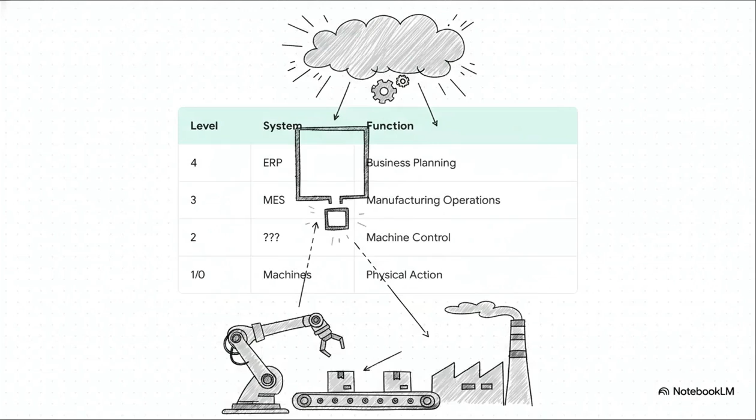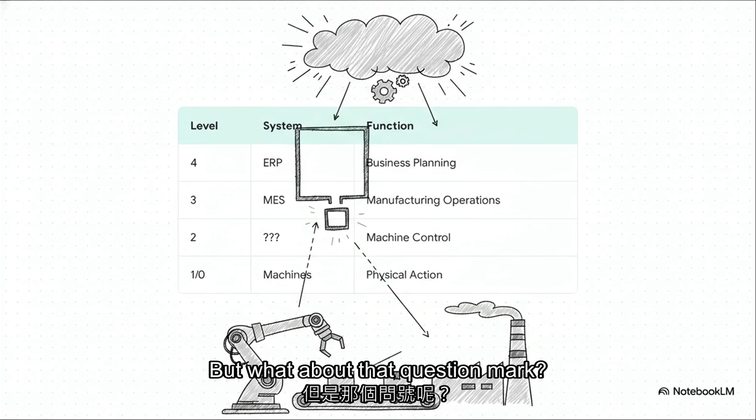See? Up top, you've got your ERP systems for business planning, down below, the machines. But what about that question mark? There's a huge gap right there at level 2. Something's missing. What's the thing that takes an order from the manufacturing software and tells a robotic arm exactly what to do? Right, that missing link, that's our hero for today.

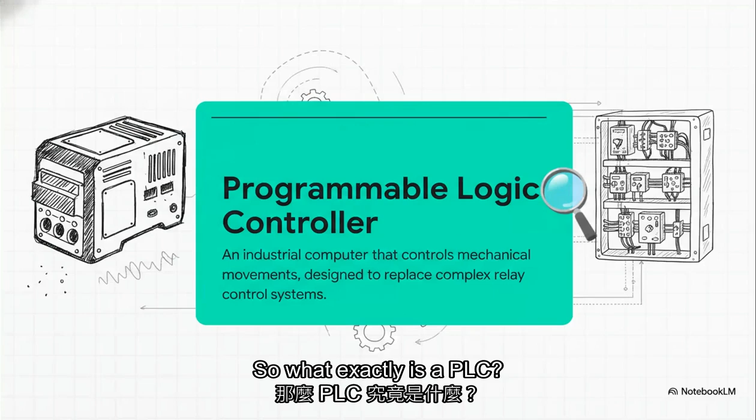It's the Programmable Logic Controller, or as literally everyone calls it, the PLC. So, what exactly is a PLC? Well, it's a computer, but trust me, it's nothing like the one on your desk.

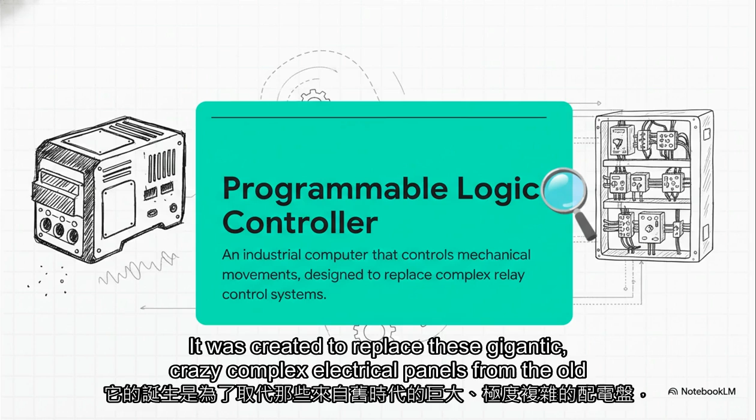This thing is an absolute tank. It's rugged, designed to get beaten up on a factory floor, heat, dust, vibrations, you name it. It was created to replace these gigantic, crazy complex electrical panels from the old days and give us precise digital control. And here's the magic trick.

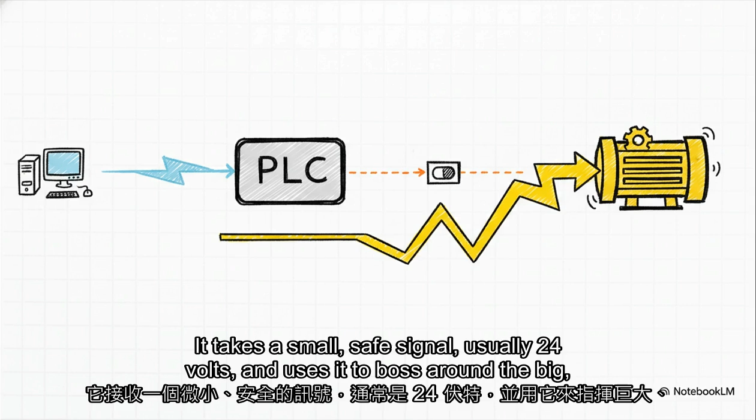Your laptop, it runs on a tiny bit of power, like 5 volts. A huge industrial motor, we're talking hundreds of volts. You can't just plug one into the other. That would be bad. So the PLC acts as a safe middleman. It's an intelligent translator. It takes a small, safe signal, usually 24 volts, and uses it to boss around the big, powerful machinery without anything blowing up.

Okay, so how does this thing actually think and act? The easiest way to get your head around it is to picture the PLC as a little robot person. It has senses to perceive the world, a brain to make decisions, and muscles to take action. And it does this in a super fast, non-stop loop called the scan cycle. It just does 3 things over and over again, thousands of times a second.

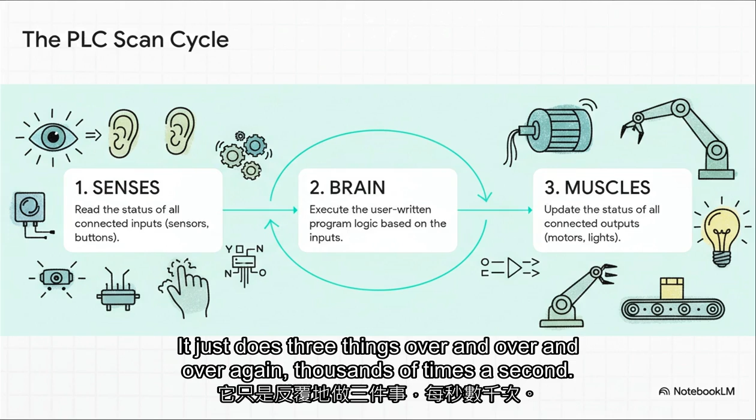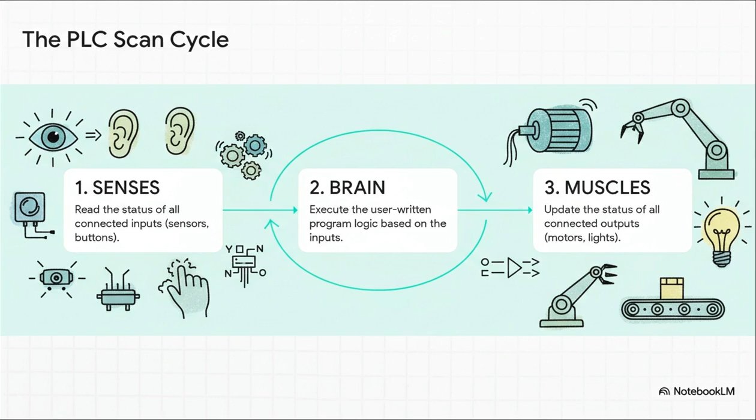1, senses. It checks everything around it. 2, brain. It thinks about what to do next based on its programming. And 3, muscles. It acts. So senses, brain, muscles. Let's dig into that.

First up, the senses. In PLC speak, we call these inputs. These are just signals coming in from the real world. Things like, is a button pushed? Did a sensor just see a box go by? Is the safety gate shut? The PLC is constantly checking all these inputs, getting a complete picture of what's going on.

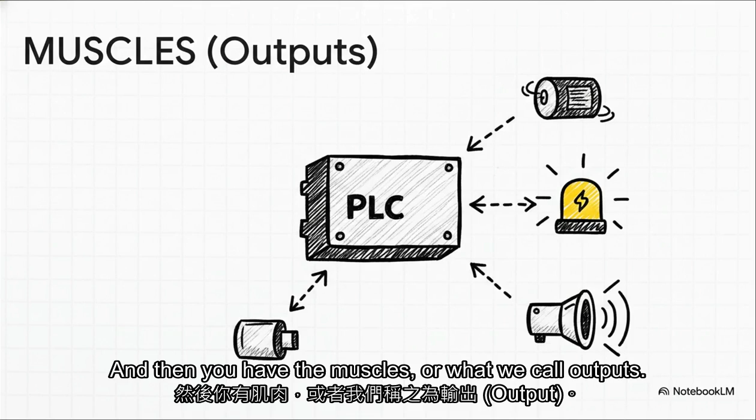And then you have the muscles, or what we call outputs. After the PLC's brain makes a decision, the outputs are the actions it takes. It sends a signal out to start a conveyor belt, turn on a big red warning light, fire up a robotic arm. You get the idea. This is how it actually controls things.

Okay, so what about the brain? How does it decide? Well, it's just following a program. But here's a cool part. The language used isn't what you'd expect, like Python or something. The most common one is called ladder logic. And it's visual. It's actually designed to look like the old electrical diagrams it replaced, which made it super easy for electricians to pick up.

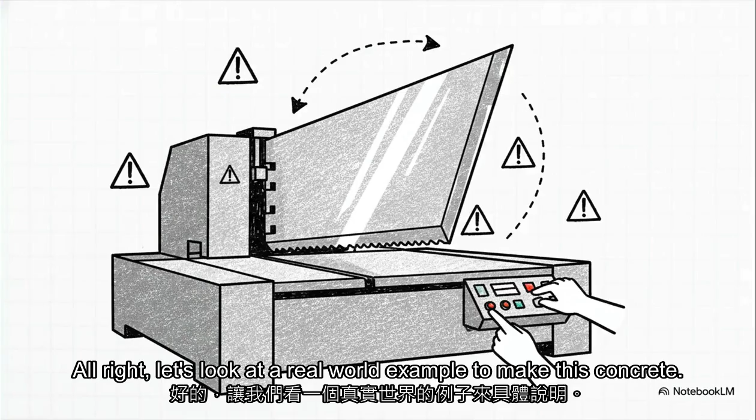All right, let's look at a real-world example to make this concrete. And it's a super important one, safety. Picture a giant industrial paper cutter.

I'm talking a heavy, razor-sharp blade that can slice through a phone book. Obviously, you do not want an operator's hands anywhere near that thing when it comes down. So the safety rule is dead simple, and there's no getting around it. For that blade to move, the worker has to have both hands on 2 different buttons placed well away from the danger zone. That way, their hands are physically occupied and safe.

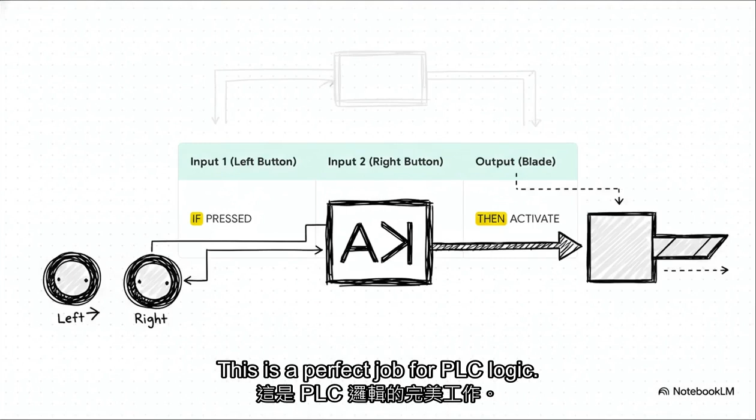This is a perfect job for PLC logic. The rule we program is a basic AND gate. It's just if the left button input is on and the right button input is on, then activate the output for the blade. The second either one of those buttons is let go, the AND condition is broken, the output turns off, and the blade immediately stops. It's simple, it's lightning fast, and it's rock-solid reliable.

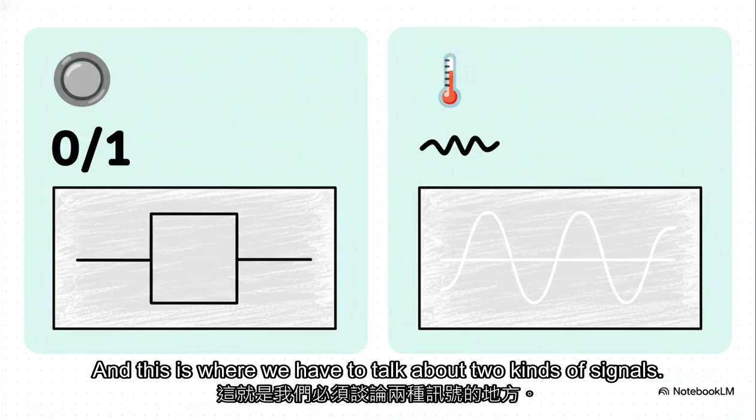But look, modern factories are about more than just on and off. That's just the start. If you want to make a factory truly smart, you need way more than just yes or no information. You need data, you need details. And this is where we have to talk about 2 kinds of signals. What we've seen so far with the buttons, that's a digital signal. It's either on or it's off. Simple. But most of the real world isn't like that, right?

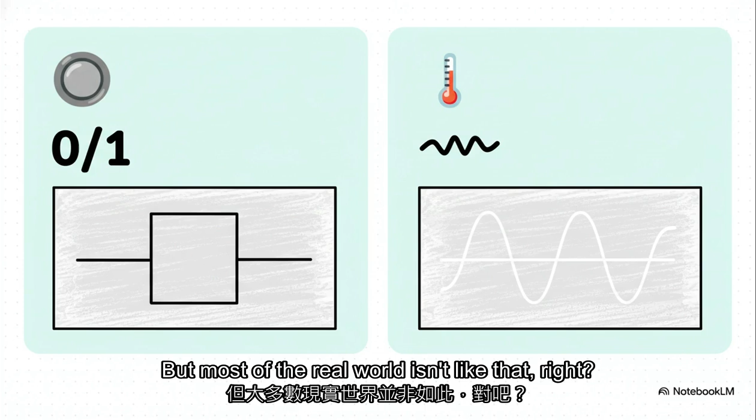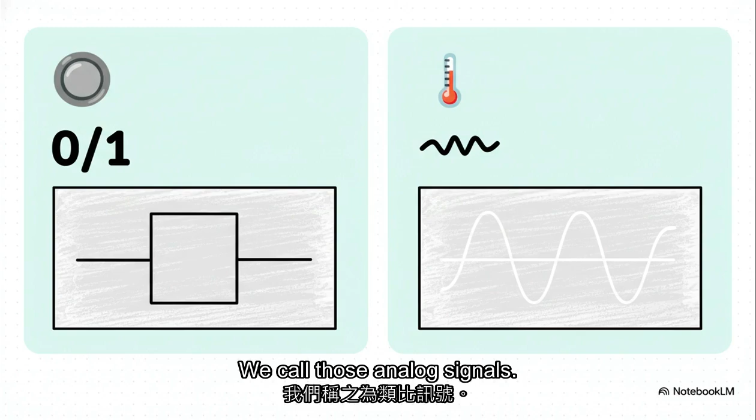Think about temperature or pressure or how fast a motor is spinning. These things aren't just on or off, they exist on a scale. We call those analog signals. And modern PLCs are smart enough to handle these too. They have special input cards that can read an analog signal, say from a temperature probe, and turn that physical reading into a number. So it's not just hot or cold, it's 38 degrees Celsius precisely. And it stores that number in a little memory slot called a data register.

Now this is the whole ballgame right here. This is what makes smart manufacturing possible. Because those data registers hold the juicy details, the exact temperatures, the precise pressures, the real-time speeds. All that data can then be read by the high-level software, the MES systems we saw earlier. That's how they can analyze performance, spot problems, and even predict when a machine is about to fail. It's all about the data.

So look, the goal here isn't to make you a PLC programming wizard. That takes years. The goal is to arm you with the right language, the key concepts, so you can walk onto a factory floor and have a really smart conversation with the people who are the experts, the automation engineers, the electricians. You don't have to be the one writing the ladder logic. But just by understanding these fundamentals, you become a way better collaborator. You can help connect what the business wants to achieve with what's actually possible on the machine level.

So here's your new superpower. You have the vocabulary now. Instead of waving your hands and saying, 'We need to know when the thingy gets hot,' you can now ask, 'Are we capturing the temperature value in a data register?' See the difference? You can ask really specific, intelligent questions that get you to the solution faster.

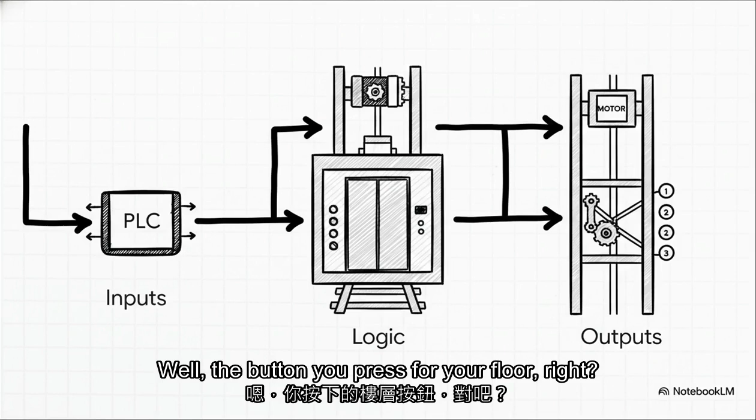All right, to really lock this in, here's a little homework for you. Next time you step into an elevator, just stop and think for a second, because you are stepping into a perfect, everyday example of a PLC-controlled system. Seriously, think about it. What are the inputs? Well, the button you press for your floor, right? And the sensor that makes sure the door is closed, that's the PLC's senses. The brain is the logic that says, okay, door is shut, they want floor 5, let's go. And the muscles, the outputs, that's the big motor that pulls the car up, the smaller motor that opens and closes the doors, and even the little lights that show you which floor you're on. It's all there. Senses, brain, and muscles.

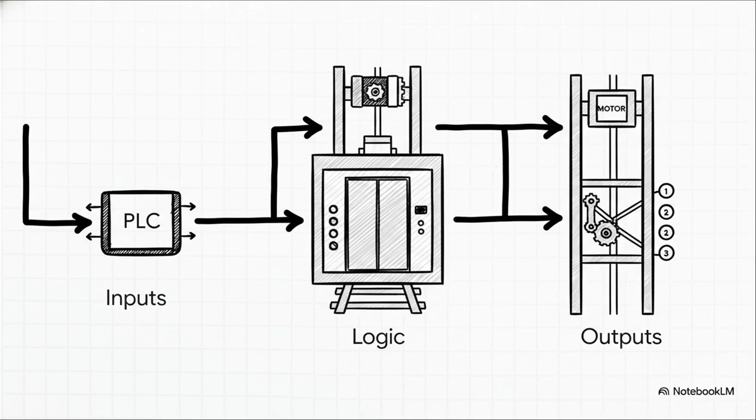Turns out, you've been using PLCs your whole life and probably never even knew it.